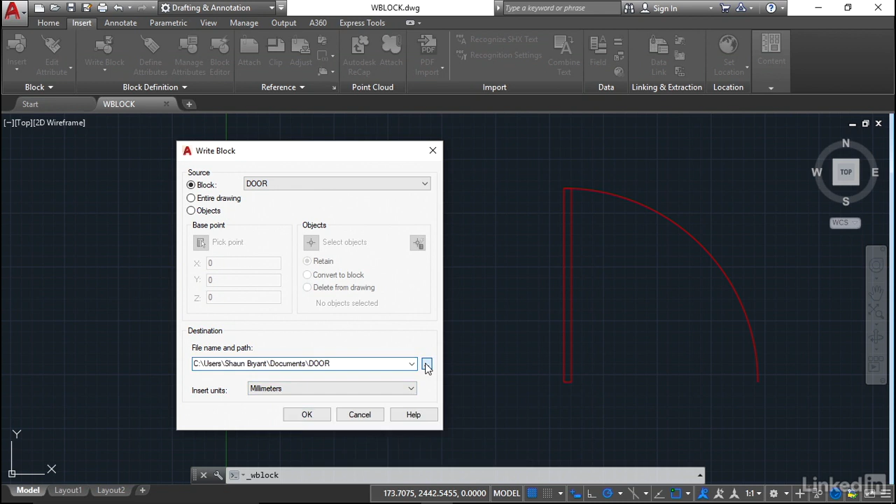So if I click on this little button here, I'm going to jump into my pictures folder, and you can see there's all my different files in there. I'm going to go to exercise files, and there's my reusing content folder. I'm going to save it in this folder as door.dwg, and I'm saving it back as an AutoCAD 2013 DWG to make sure that all different versions of AutoCAD can read the file. So I'll click on save. There's my location. I click on OK, and you'll see a little flash top left corner indicating that that block information has been written to the DWG file.

Now, here's the best bit. I can now give that door DWG file to somebody else to edit. They can let me have that edit, and I can bring it in to this drawing, my wblock drawing. So I'm going to act as if I'm a separate CAD person somewhere else. So I'm going to go to Open. There's my door file, and I'm going to open that up as a separate drawing. I'm just going to double click on the wheel to zoom extents, and there's my door. And I've got all of my little component objects. So it is a separate drawing, but it's broken the block down into separate elements.

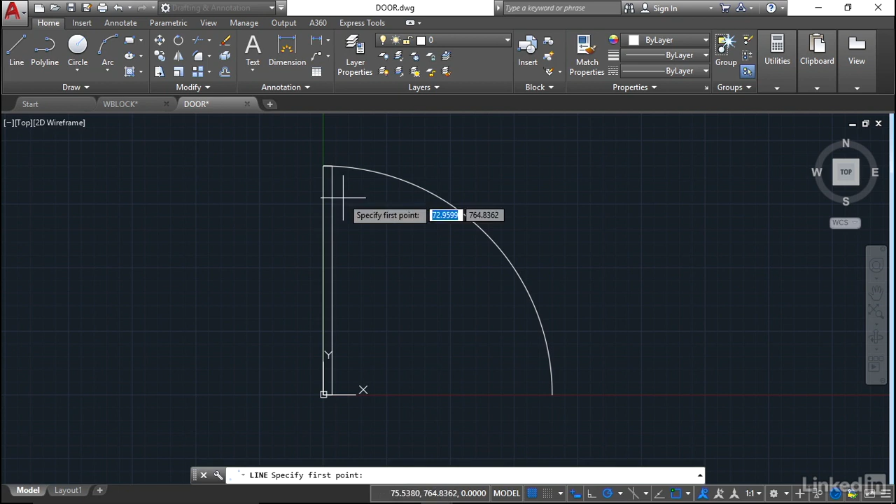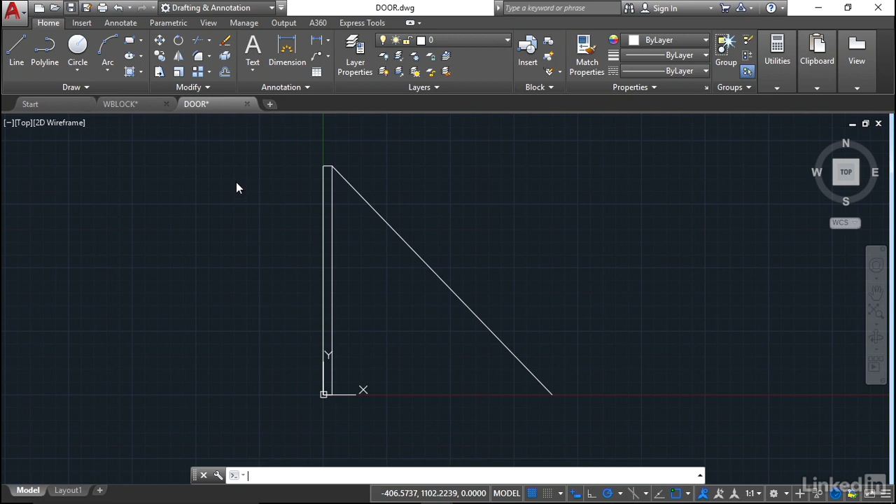Now, these are all on layer 0. So I'm going to go back to the Home tab and go to layer 0, make it the current drafting layer. I'm going to draw a line from that endpoint snap there down to that endpoint snap there like so, and press enter. And I'm going to remove the arc like that. So that's my new door block, with an angled line representing the door swing instead of an arc. So I'll now save that file, and I can now close that. So that door has now been saved to its own separate DWG file.

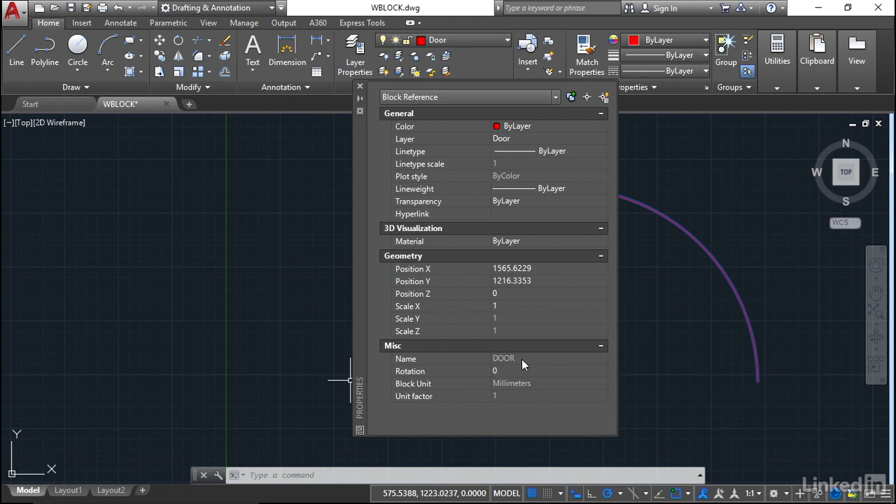But what you've got to remember now is this block here is also called door. And you can check that by checking the properties. So if I select the block, right click and go to properties, you'll see the name of the block there is door, which is the same as the DWG file that we wblocked out of the drawing initially. So let me just hit escape to deselect. So here's the interesting thing. I can insert a block from a known drawing rather than the block itself.

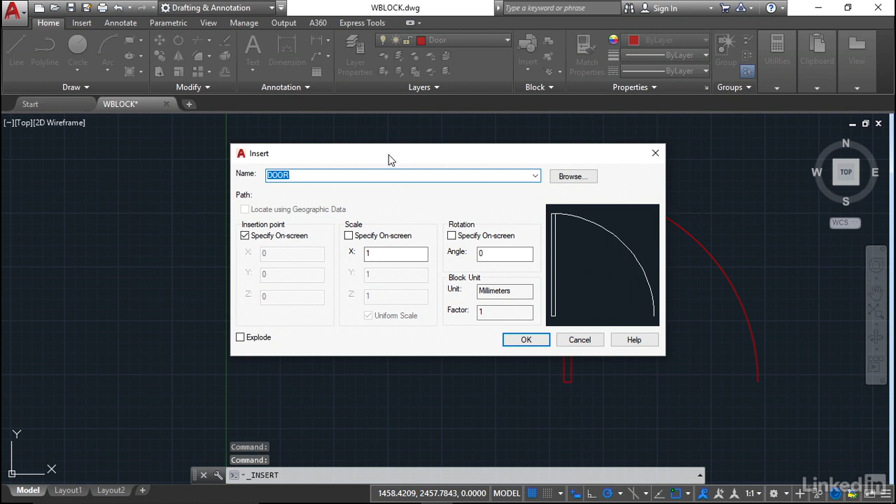So if I now go up to Insert Block and go More Options, it takes me to the Insert dialog box. I can browse for my door. I'll jump back in and find that folder, which is nice and easy. There's my reusing content folder. I go back now to the door drawing, and you can see it previews what I've got in that door DWG file. Remember, I removed the arc and put the straight line in. So if I now go open, can you see it's taken me to the path where the door DWG file is? Insertion point I will specify on the screen. I will leave everything else as it is. I want the scale to be 1, the rotation to be 0. I don't need to explode it, so I won't tick the box.

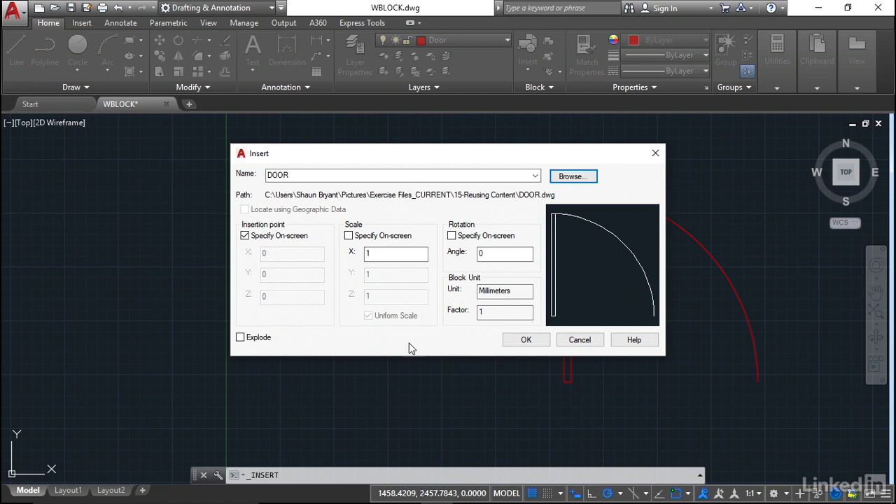Watch what happens when I click on OK. I redefine the block because there's already a door block in the drawing. But I'm redefining the door block from the wblocked DWG file this time, instead of a block reference that already exists in the wblock.dwg file. So if I redefine that block, you can see that the existing block takes on board the straight line, and I've got a new block that obviously has the straight line as well.

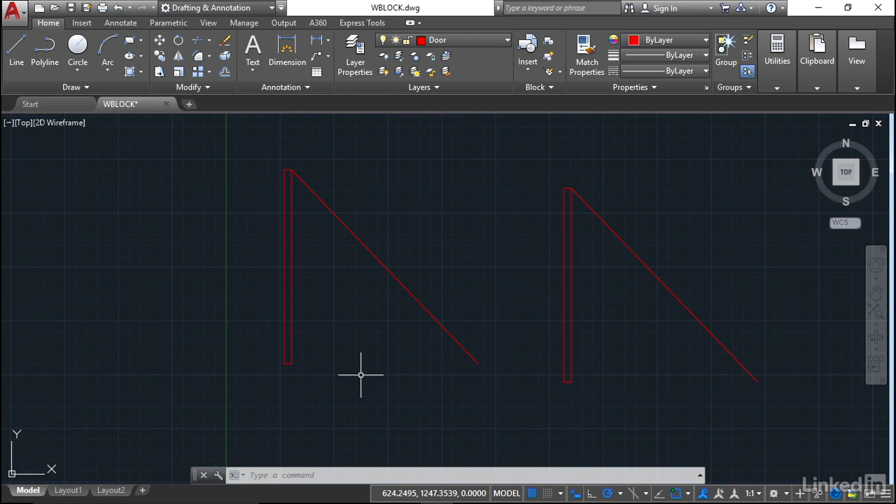And that's how you can wblock out block information from a drawing, put it into its own separate DWG file, make the changes, and then bring the drawing back in. It's a really useful tool if you want somebody else to work on a block, change the block, and then give it back to you. So that's your wblock command for reusing content in your AutoCAD drawings.